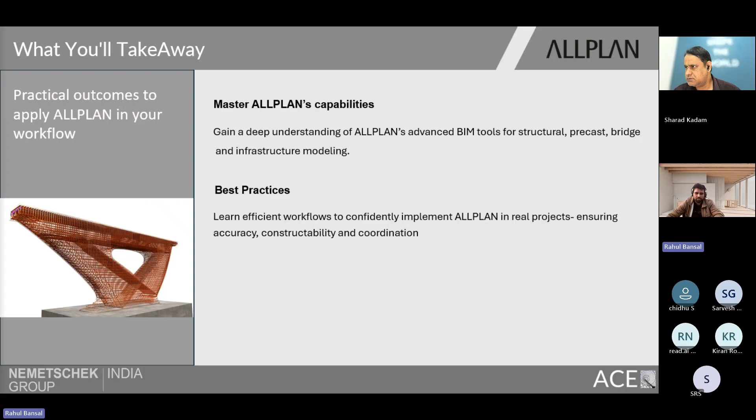Here's what you can expect from today's session: you will gain a strong understanding of Allplan and its efficiency in structure, bridge, or infrastructure modeling. You will also learn best practices, so you leave with the confidence to apply Allplan effectively in your projects. We'll also share resource materials and a participation certificate after the webinar.

I would like to introduce today's presenter, Mr. Sharad Kadam. He is the Customer Success Manager for Allplan at Nemetschek India. Mr. Sharad brings over 22 years of industry experience and has worked across India, USA, Europe, and the UK. His expertise is in structural engineering, bridge infrastructure, precast, and rebar detailing projects, along with some experience in building BIM services. He has hands-on knowledge of multiple industry-leading tools like Allplan, Tekla Structures, Revit, Rhino, Grasshopper, and AutoCAD. Today he will be sharing valuable insights and demonstrating how Allplan supports accuracy, efficiency, and design workflows.

About ACE Consulting Engineers: it is a knowledge and software partner for the AEC industry, and has already supported multiple organizations across India with multiple products. ACE Consulting Engineers is made up of structural engineers and professionals who help deliver efficient and practical economical software solutions. We are proud to have worked with 300 plus clients, delivered over 30 plus products, and supported projects across 20 plus locations.

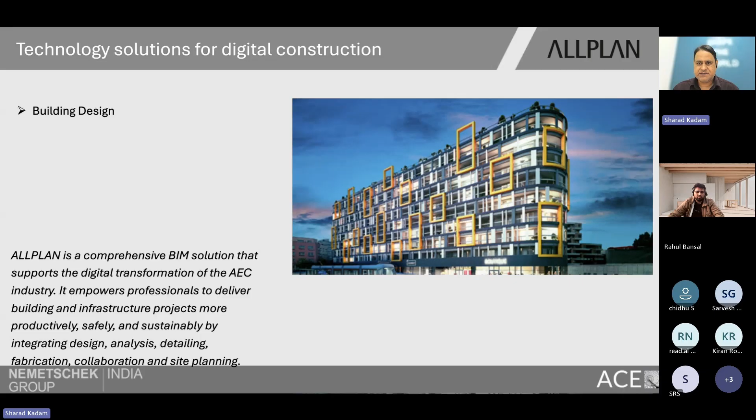To start with building design - this is a vertical of ALLPLAN wherein we can do vertical construction, complete architectural precast, and everything related to building structures. In horizontal structures, we are into infrastructure design, and we can also do analysis and design, modeling, pre-stressing cables, 3D rebar detailing. Everything can be done in infrastructure design. We'll see all these things in detail in the coming presentations.

Then we are into the construction planning segment as well, wherein we can do precast designing or site planning. All these things can also be done.

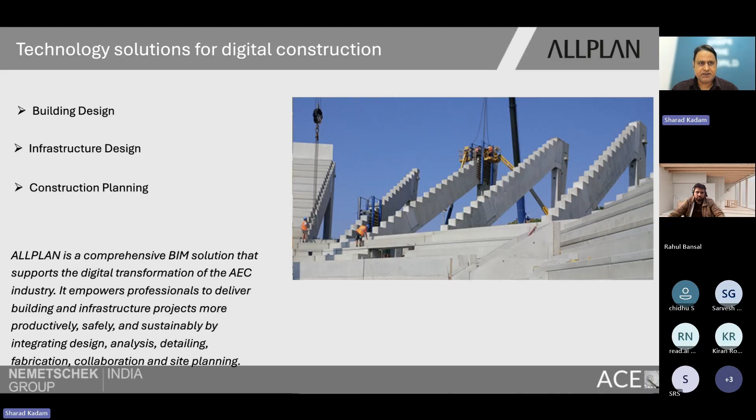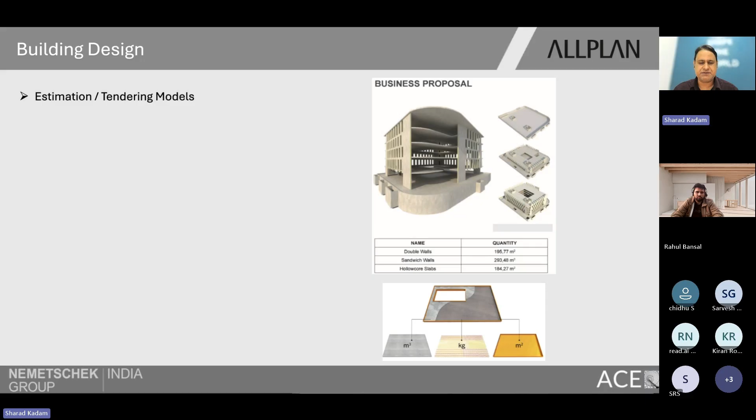Moving on in the building design segment, we can do quick estimation and tendering modeling. This is a vertical wherein a quick tender model has to be created so that it can be presented to the company, and a quick estimation is also needed. In this scenario, we can do quick modeling of the complete project. It may or may not be completely accurate, but rough estimations can be taken out, which will be fairly, we can say, 95 to 105% accurate.

Then the next part is for the rebar detailers. Companies that are into rebar detailing or rebar detailers doing actual project work can also use ALLPLAN for rebar detailing.

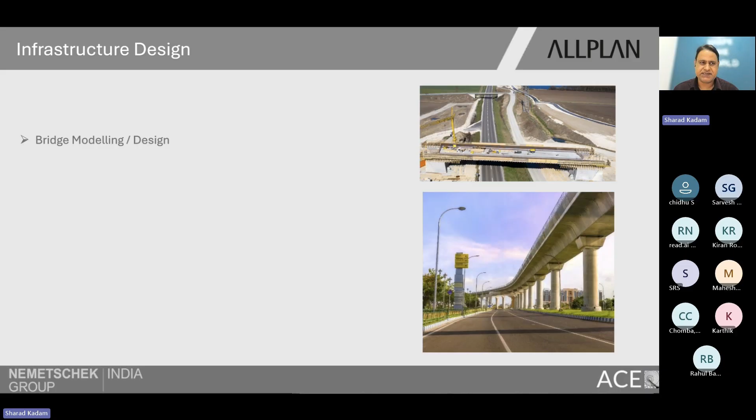The second vertical we talk about is infrastructure design. When we talk about infrastructure, it comes up with bridge - the first and foremost thing. We can do bridge modeling as well as analysis and design. In the analysis and design, we have predominantly all the codes available - British, Euro, ACI standards, all these standards are available. We can do typically any kind of bridge modeling.

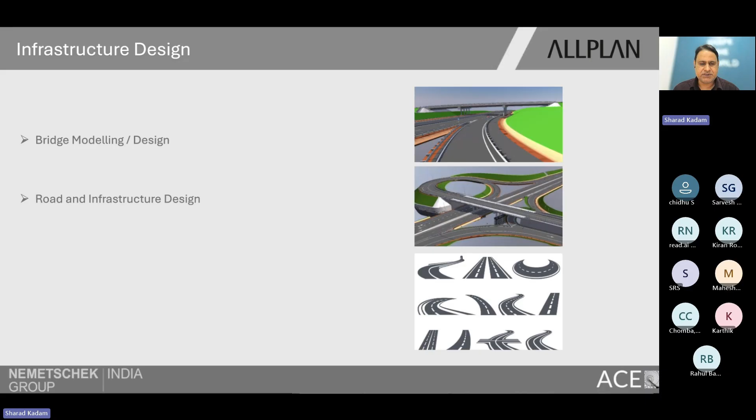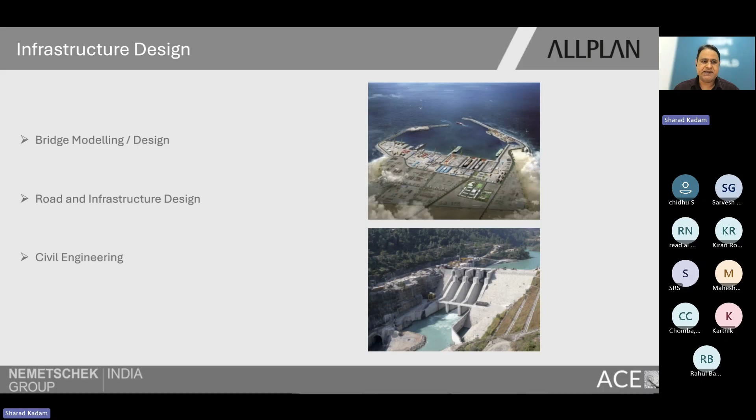The next part is road and infrastructure design. We can do all the road modeling and infrastructure design as well. In civil engineering, we can do heavy civil parts such as dams, hydraulic structures, ports, or anything where concrete is getting poured out. We can do all these kinds of different infrastructure projects.

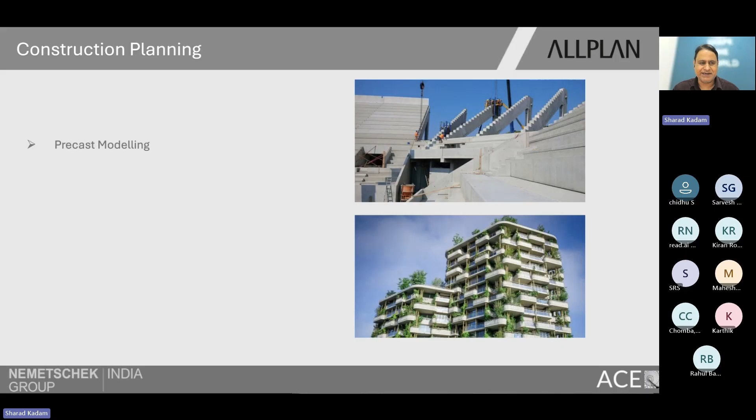In construction planning, the first part is precast modeling. Precast is mainly for residential commercial complexes or stadiums - any kind of precast needed can be done with the help of ALLPLAN. We have really good dedicated tools for precast modeling and detailing. Other than precast modeling and detailing, we can also work for fabrication purposes.

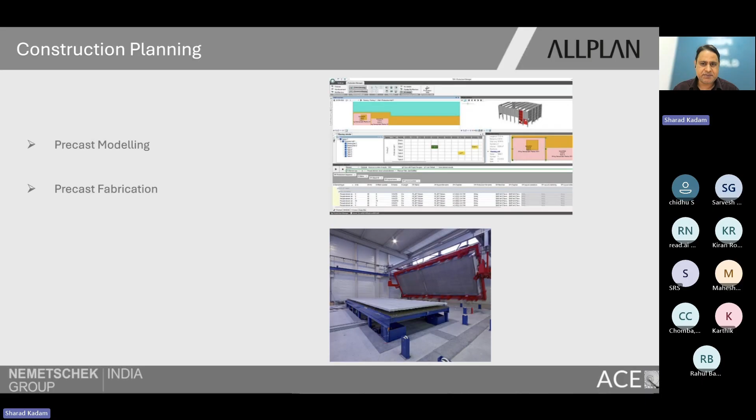Companies having their own precast fabrication plants can also use the feasibility of the fabrication. We call it TIM, which is basically for factory management. So we can do that.

In site planning, we can also work on the formwork. Formwork is something of a niche market - many companies don't prefer to model it, but we can do complete formwork modeling for cast in place or cast in situ concrete.

On the site planning part, there could be some temporary roads, stackyards, junkyards - all these things can be planned at the site in the modeling stages itself, so any changes or painful areas can be identified at the initial stages, and there should not be any surprises coming up later. So this is about site planning.

So in all, we are into construction planning, infrastructure, and vertical constructions as well. Then we have cloud collaborations.

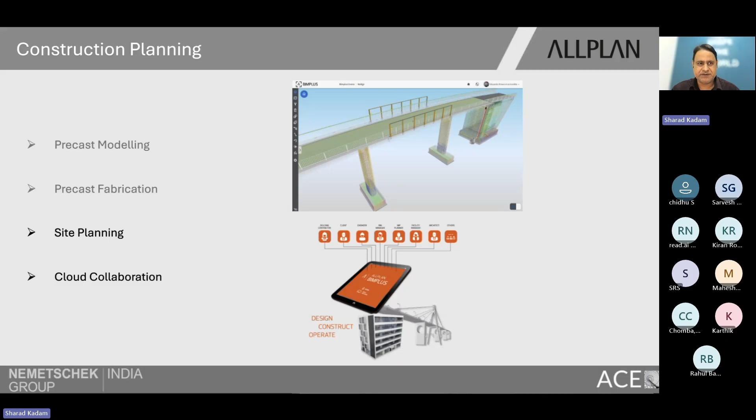After the post-lockdown era, we see that a lot of companies are working from home or remote areas. We have cloud collaboration, that is BIM Plus, which allows multiple stakeholders to work on the same project at the same time without sitting in the office. This cloud collaboration can also send the same model to the site for actual visualization purposes. This is a very useful tool, and it comes free with the software. BIM Plus is very useful for cloud collaborations.

So these are the various verticals that we are having. Moving on to ALLPLAN - it's a very powerful tool which helps for the complete architectural, engineering, as well as the construction environment.

So it's precise. One of the key things we talk about is precise 3D reinforcement detailing. We can detail any kind of reinforcement, and it is reusable. We can save these as templates.

We can work in 2D or 3D at the same time. That means if someone wants to work in the 2D platform, 3D by default is the output we are getting. The model is reliable for cost estimation.

It's an open BIM platform, so if we want to save or send our model to other stakeholders, we can do that from IFC, or there are multiple options to do that. Drawing qualities are superior, and we'll be seeing that in detail in the upcoming presentations.

Predominantly, Allplan can be used for precast. Precast is the first part wherein Allplan is used. We can detail any kind of precast elements, whether it's walls - there are multiple types such as sandwich wall, insulated wall, solid wall, brick wall - all can be easily modeled. Similarly, in slabs, there could be hollow core slab, solid slab, double T slab - any kind of slab can also be modeled.

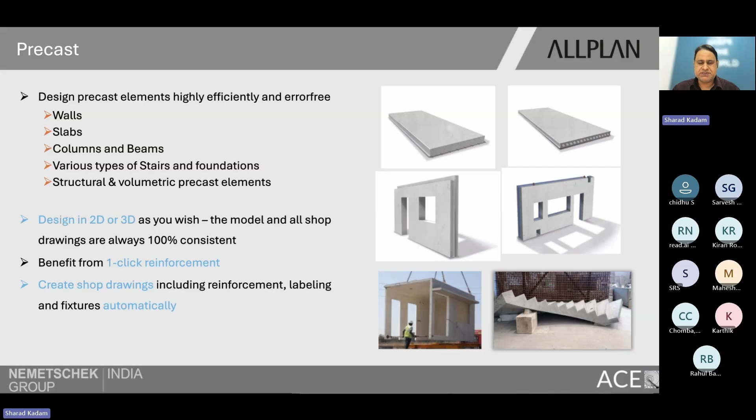In precast, some of the really good tools are for automated wall panels or slabs. With one click, we get automatic rebar detailing as well as all the inserts or fixtures done. We also get quick drawing production. We have some standard templates, or these templates can be created by the user as well - it's very easy to create these kinds of templates, so the output drawings we get are superb, roughly about 90% good to go.

There could be some manual work needed, but it's very minimal. The workflow is such that we can switch between 2D and 3D at any point in time.

We also have some really good tools such as IFC wall slabs - if someone is getting the model from any other software, we can import it through IFC, and that same IFC can be converted to walls, slabs, or any other precast element with one click. We have something similar for reinforcement for staircases as well.

We also have integrations with fabrication equipment - whether using a fabrication tool from Elematic or any other precast company, we have integration with that as well. We have BIM+ collaboration, where multiple people can work on the same model at the same time. The last part is the TIM portion, which is basically factory management. So that's about the precast portion.

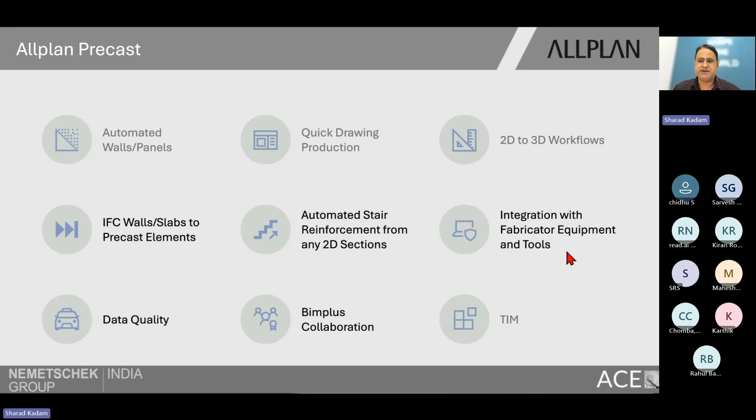I'll just run through a small AV. Here is a small model where we can see some walls. I've just isolated one wall - this is basically a sandwich wall. With the visualization tools, we can switch things on and off as required.

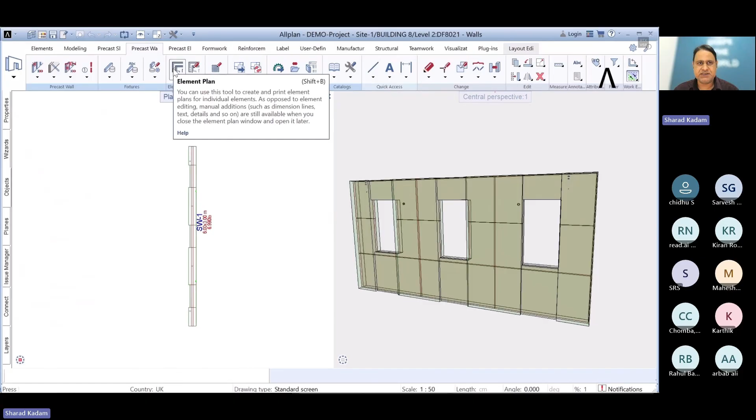With one click, we can create the drawings here. We can select some of the templates that are created, and choose the template as per our requirement.

Multiple templates can be created for the same element. So this is the default output that you're seeing, where all the views are clearly identified.

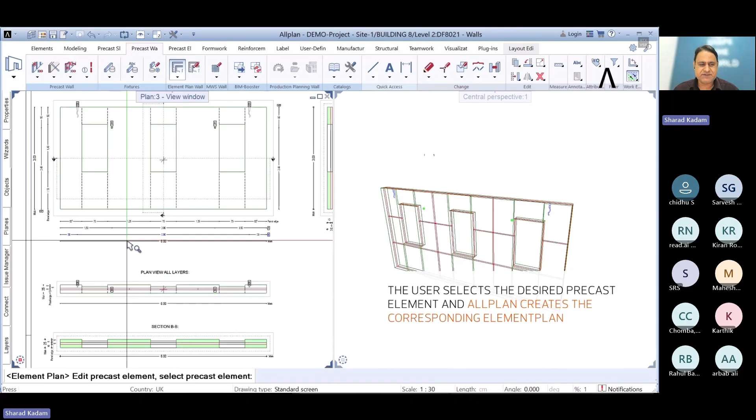On the left side we have a 2D plan, which is basically the drawing, and on the right side we have a 3D model. So we can see both the drawing as well as the model at the same time. We don't need to close the drawing and go back to the model for doing any kind of changes. We can make changes here in the drawing, and they will get automatically updated in the model. Or if you're comfortable changing it in the model, that's also possible, and the drawings will get automatically updated.

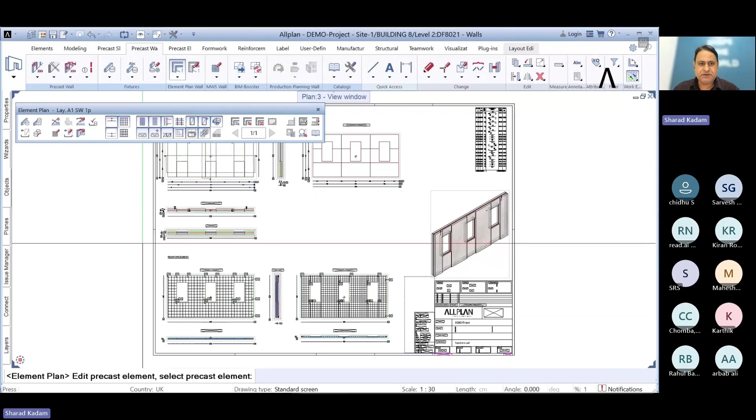If you want to see the rebar, because there could be some views for rebar, it automatically comes up with the labeling, that is the bar mark and everything, as well as the bar bending schedule. If I need to see the 3D view, we can switch it back again.

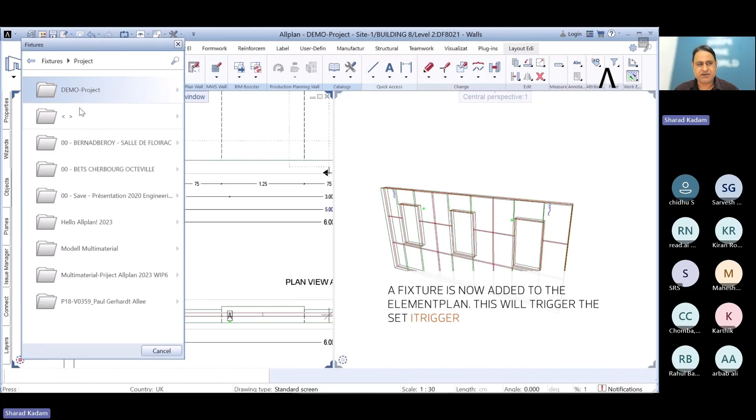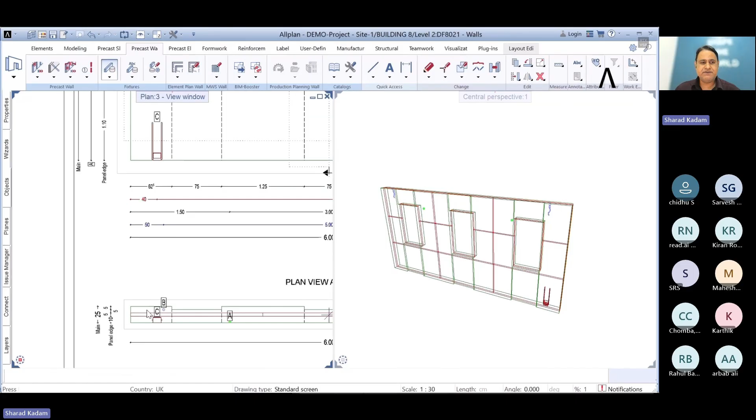Here we can identify that some fixtures or inserts are missing. We can put them in at the drawing stage itself, or at the modeling stage also. So here I'm choosing some of the inserts, and we can put them into the modeling directly from the drawing. If you're comfortable putting it into a section and choosing the location where it needs to be placed, with one click you can see it has automatically identified it, and it has updated the dimension also, because whenever we add something we need to check whether the dimension is correct or not.

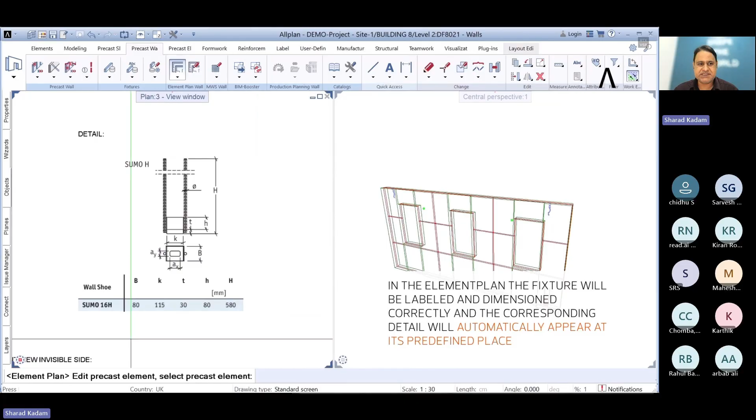Here we can see it also adds some cross-sectional details. These things we can easily obtain, so there is no manual detailing work needed. Also, if the rebar needs to be cut at that particular location, it automatically gets cut, and again the bar bending schedule updates. Also, the bill of material gets updated.

If I just add one Peikko insert, it automatically identifies and gives the quantity. Now, if I need to do changes at the modeling stage, I can just copy these Peikko inserts to some other locations, and it will automatically update the quantity as well. So this way, we can choose to work in the model or in the drawing at the same time, and whichever is changed will be automatically updated in the other.

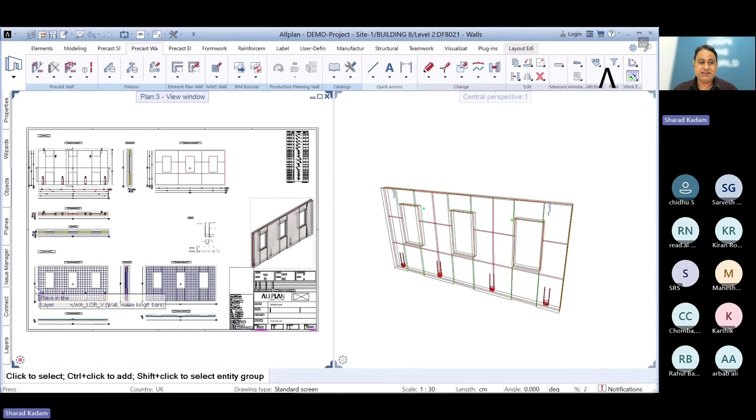Once my inserts are added, it automatically does the labeling portion as well, so we don't have to check whether the labeling or dimensioning is proper or not. These are some really good features available in Allplan which are not available in any of the precast detailing tools we have in the industry.

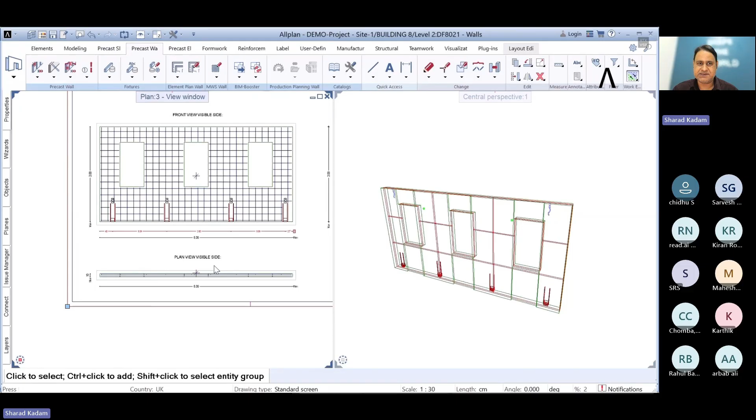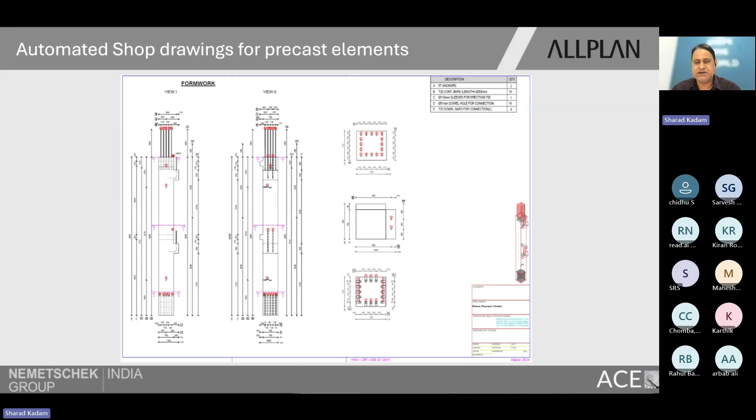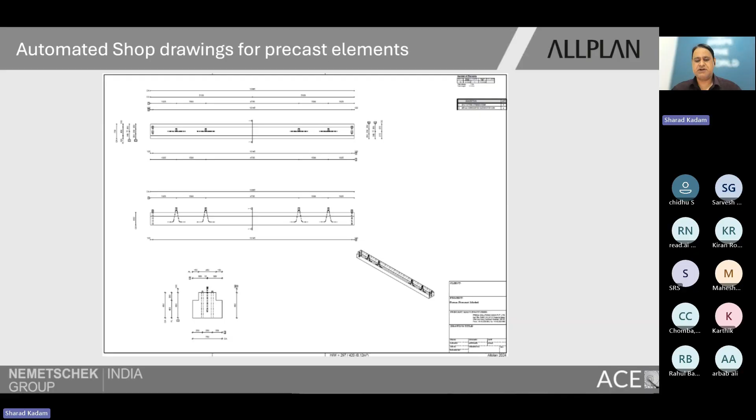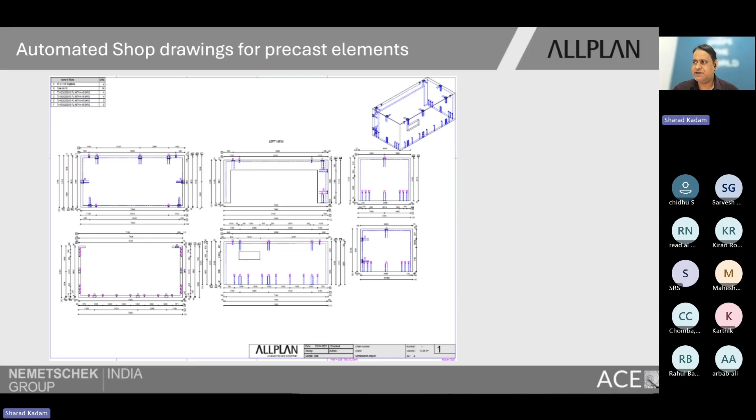Some more drawings, some beam drawings. Typically beams have lifting inserts and connections at the end, and there could be a couple more cross sections needed to be added. We can plan our template so that our drawing output will be 100% accurate with no manual work needed. This element we call a volumetric element, where we need to create views from all the edges or end views, and a 3D view is also needed. This drawing too has been created with zero manual work.

Moving on ahead, the second vertical we talk about is the bridges. The first vertical we saw was about precast, whether residential, commercial, hospital buildings, or parking garages, any kind of precast elements can be done. The second vertical is Allplan Civil, which covers the infrastructure part, that is roads, bridges, tunnels. All these things can be easily done with Allplan Civil.

Allplan Civil is basically a template-based design, so again we can create templates which are reusable. Suppose we have some bridges, maybe single deck bridges or normal pre-stressed bridges, we can create the templates and save them, and this can be reused for our next project.

Then we have parametric modeling. So if there are any changes in my alignment or axis, the project gets automatically modified accordingly.

Then we also get some automated reports. So once my model is completed, we also need to create drawings, bar bending schedule, reports, quantity takeoff. All these things are automated because my model is the real source of truth.

Then we also can do the rebar detailing, clash checking for rebars if it is clashing with any of the inserts of bridges or embeds. So we can identify it at that stage.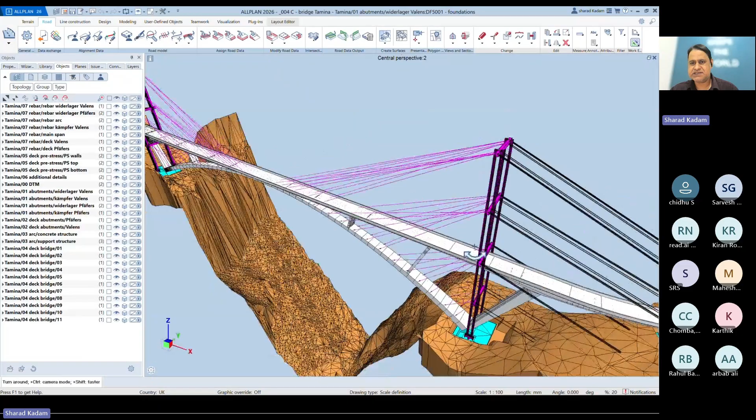It's including the rebars, and everything has been modeled here. So you can see that a complete bridge with pre-stressing cables is also available here. So all these things are being modeled in ALLPLAN. This is basically for doing complete rebar detailing and all.

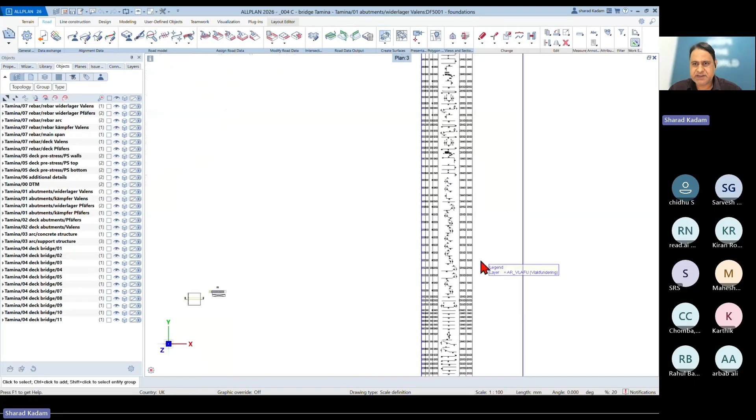Now I'll take you to, yeah, I'll just move one step here itself so that I can show you about the bar bending schedule as well. So here we have the bar bending schedule. Immediately as we create some rebar details here, you can see that this is the default bar bending schedule that is getting created. So we don't have to spend any extra time creating these kinds of bar bending schedules.

And this is basically drawing based. So whatever rebars have been modeled or detailed in that particular drawing, we will get all these things here. And this bar bending schedule is fully customizable. So suppose if we have our own standards, we can modify it and use it as per our requirement. So when I'm here, I'll just talk a bit about these particular things.

So basically, when we talk about ALLPLAN, it starts with architectural surroundings. Architectural and surroundings are for companies that are into the architectural segment and want to do complete architectural work. So here we can use this, and you can see that our top menus automatically change based upon that. So we can do complete architectural surrounding work as well as infrastructure.

So I was talking about infrastructure, that is the bridges. If we want to do the bridges portion, we can do it here. Other than that, if someone is interested in the precast portion, we have precast tools available, starting with precast slab, precast wall, and anything other than slab and wall comes into the precast element. So we have some really good dedicated tools as per our requirements. If someone is into precast, we can stick to the precast tools and precast elements.

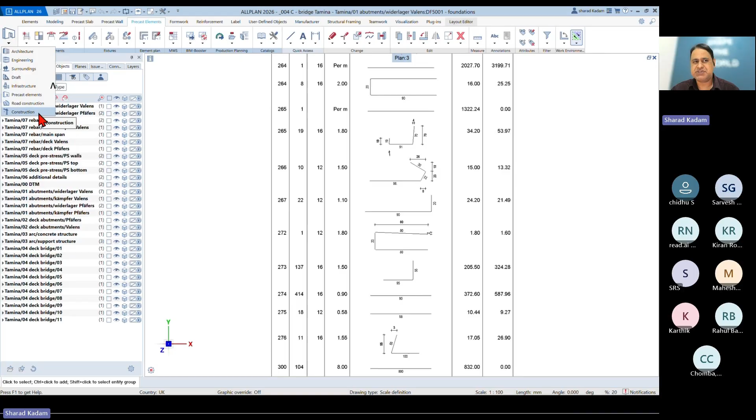Someone into the infrastructure portion can stick to the infrastructure portion. And we also have road construction and the actual construction things as well. So that's about the ALLPLAN side on the civil portion. So typically any kind of bridges, we can model it out here, and it's really very easy to model and handy as well. It can be worked in 2D as well as 3D mode.

Now coming back to the ALLPLAN civil portion. So this then is the graphic user interface, or GUI, what we call it for ALLPLAN bridges. For companies into bridges, you can see that here we can easily create some really good models, which can have, starting with the substructure like pile cap, or if we start with the abutment portion at the start, at the end abutments are there.

We can model these easily, and we also have some I-girder beams here with the pre-stressing cables, as well as the rebar can be easily modeled here. So when we talk about bridges, it starts with the digital terrain.

So here we have the digital terrain as well. If you're not getting a digital terrain, it can also be obtained from Allplan, or if you're getting it from other software companies or providers, we can import that too. Allplan is an open BIM platform wherein we can import data from other software, as well as export it to other software.

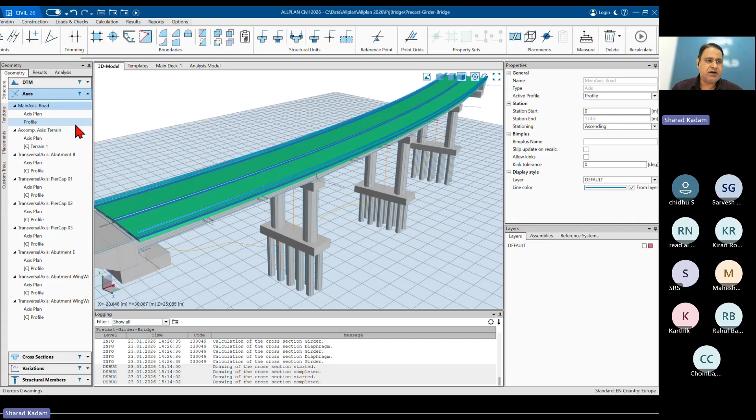We have various kinds of axes available. When we talk about horizontal construction, rather bridges, tunnels or roads, we talk a lot about the axis. So here we have different kinds of axes. There could be multiple axes for a project - horizontal, vertical - and we have the feasibility of modeling any kind of axis at this particular location.

Also, if we are getting the axis from any other software like Civil 3D, we can directly import it over here. So we don't need to redo the things which have already been done by someone else in some other software. We can import it directly here.

The next part comes up when we talk about the cross section. So let's say if I have some decks like this for bridges, or some girders like an I-girder bridge, we can easily model it. Here you can see some horizontal and vertical lines which are maybe straight or inclined. We have to just connect the dots and create our own deck or girders as per our requirement or design requirement.

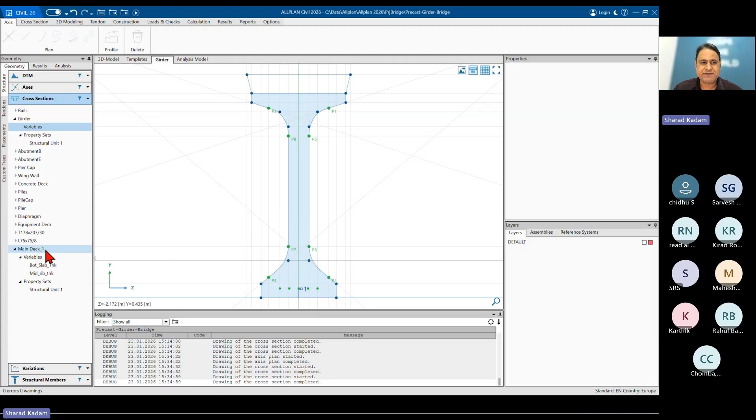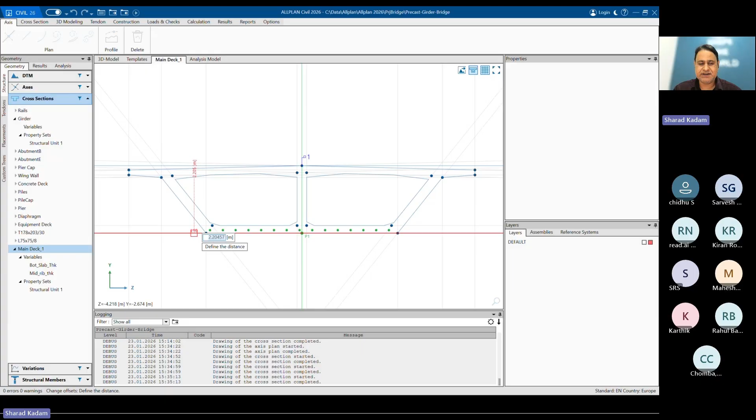These things are completely parametric and reusable. So suppose if we have created something with a 13-meter span, a 30-meter width of carriage, and there is a second bridge of maybe 6 meters, with dimensions changing - we don't need to create it again, the same thing can be used. This is completely parametric, so suppose if my height is changing, we can easily make changes within there itself. We don't have to redo the things again and again.

That's something which we call templatization - create a cross section, save it as a template, or we can save the complete project as a template as well. That depends upon the project-to-project basis and the user-to-user basis.

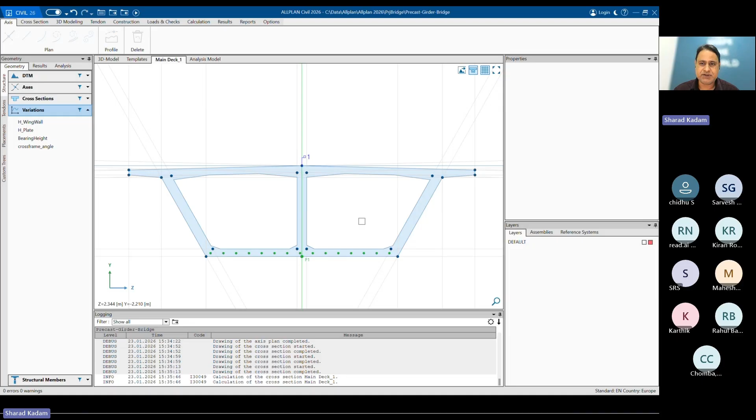Then we have the variations - variations means the changes. Generally what happens is in bridges, the height, depth, width, thickness all change or vary according to the length of the bridge. So we can create some tables like this. These kinds of tables can be imported from a notepad file or an Excel file, and these things can be easily copied and pasted out here. So these are the variations that we talk about.

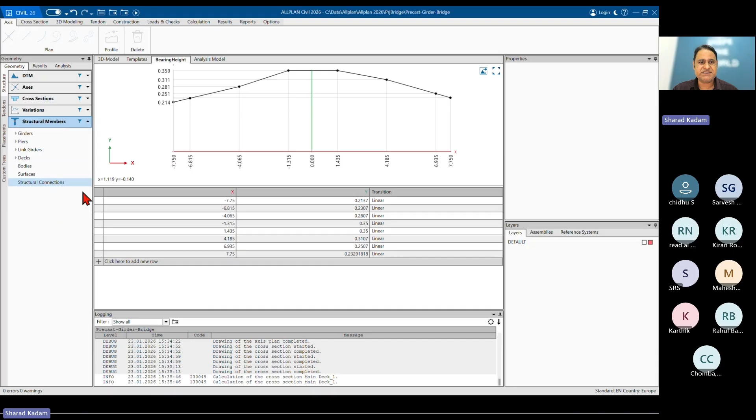Then in the structural members, typically any kind of structural member can be modeled - whether it's a girder, pier caps, decks, anything can be easily modeled and created here. This is primarily for the bridges.

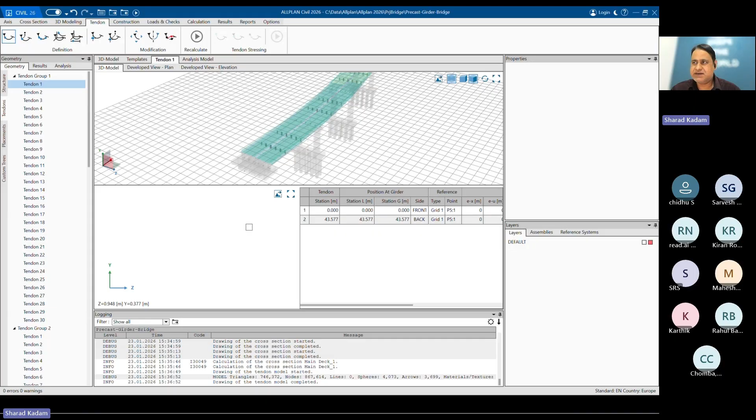Once this is done, the next part is the pre-stressing cables or tendons, as we call them. We can model any kind of pre-stressing cables or tendons - we have really good tools available for modeling tendons. For a girder, the tendons may generally be horizontal, or there will be a slope inside it. We can model any kind of tendons with these tools. When it comes to bridge modeling, this tool is super easy and very efficient for modeling any kind of bridges.

Now coming back to my presentation here - this is a particular project wherein we have done the tendon modeling. This tendon modeling, again, was varying with the geometry, and the customer found it to be very easy for doing these kinds of pre-stressing cables or tendon modeling with Allplan. To do the same thing with any other software, we need a couple of more software like Grasshopper, Rhino, Dynamo - then only this kind of freeform modeling or tendon modeling can be easily done. But all these things are inbuilt with the software for us.

Then we can create, once my tendon modeling is done, we can create the drawings as well for that. Here are some of the drawing examples, which is for those purposes.

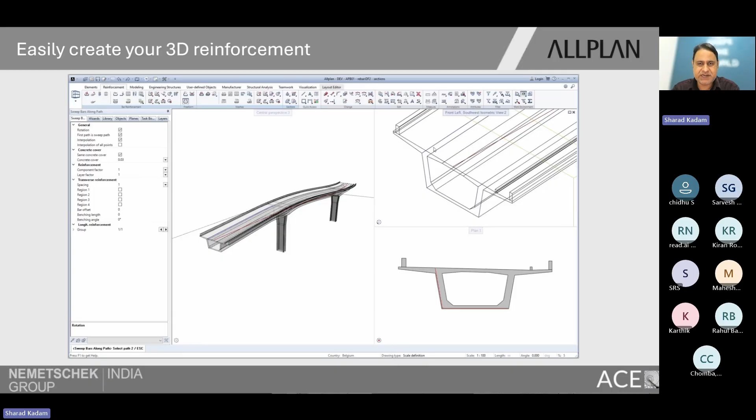And once this is done, rebar modeling comes into the picture. We have really good tools for rebar modeling - tools which, as I was talking about, with one click we can do complete rebar detailing, as well as choose the rebar as per our requirements.

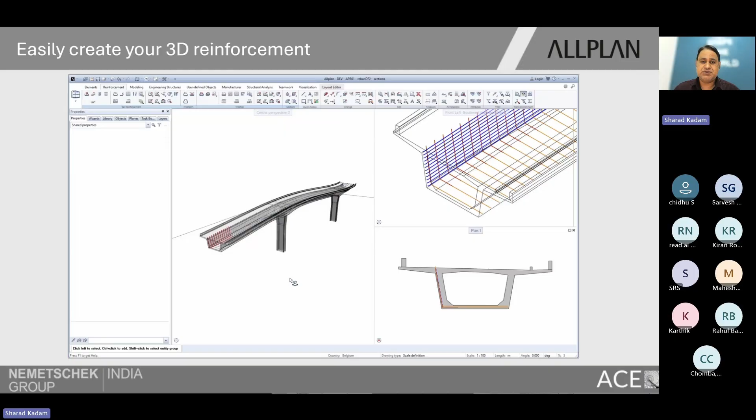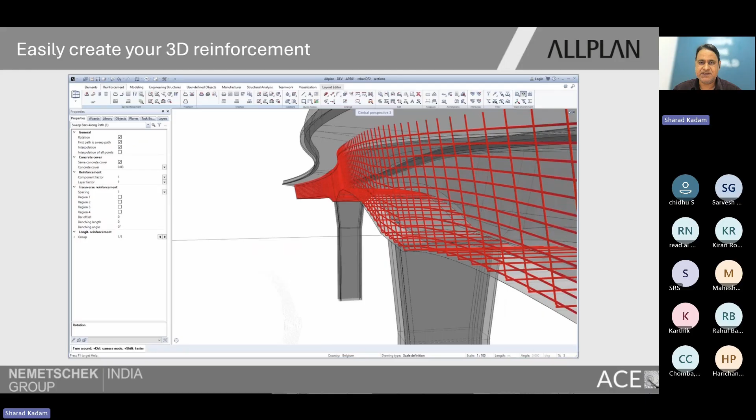So here you can see some of the rebars have been modeled in the plan, but these rebars vary with the geometry. This generally happens with bridges - the bridge geometry is varying and I want my rebar details to also vary. So in one click, a complete rebar can be modeled for a complete span of bridges, or as per our requirement we can use these tools. These tools are very handy and they change as per the geometry. As my bridge varies, the rebars also get updated with it. So these tools are really very good for modeling any kind of rebar for any kind of shape - this can be easily done. Some real good tools for rebar detailers are available here.

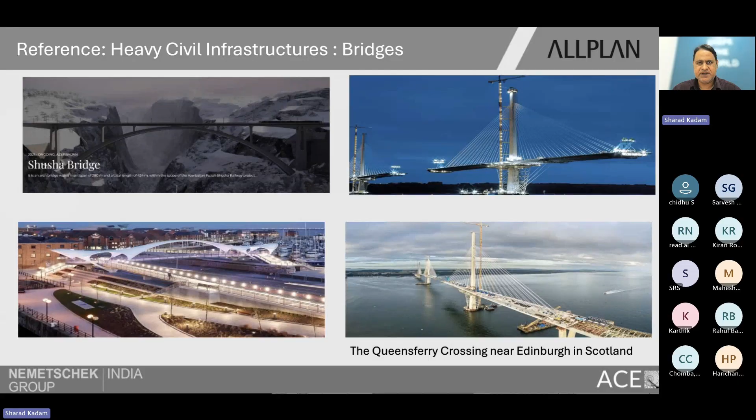So these are some of the reference projects. The topmost left side is basically the Shusha Bridge - it is the tallest bridge in the Europe part. On the bottom side we have Queensferry Crossing, in Scotland, Edinburgh. So these are a couple of bridges done using Allplan Civil. Then there is one more project - this is basically the Tamina Bridge, done in Switzerland. It's a 417 meter long bridge, and a complete model has been done with the help of Allplan only.

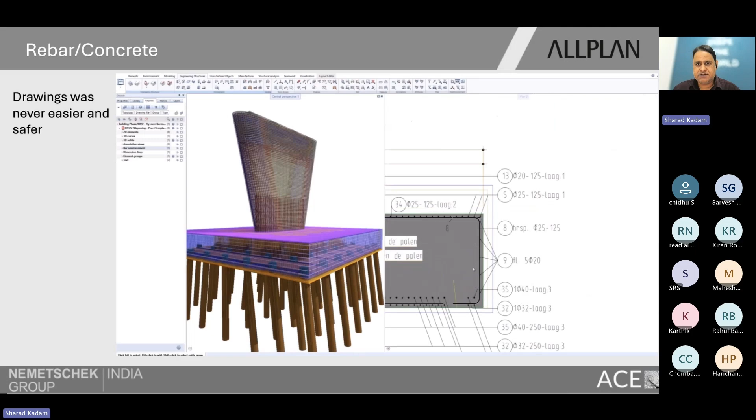Now I'm coming back to the rebar detailing. This is also for rebar detailers as well as can be used for bridges. Here you can see on the right hand side I have the drawing, on the left hand side I have the model. So I can see both things at the same time at the same locations. We can easily work either in drawing or model, and any changes I need to make, I can do it at that particular location.

Here we can see that bar number 9 has a quantity of 5, and once I click on that bar, the same bar gets highlighted on my model also, or the cross section, or in the drawing, wherever it is located. If there's any change needed for this particular bar - let's say the quantity is 5 and I need to change it to some other value - you can see it also shows in the next top section. So if anything is selected, that particular rebar will get selected at all locations. It's very easy to identify and change.

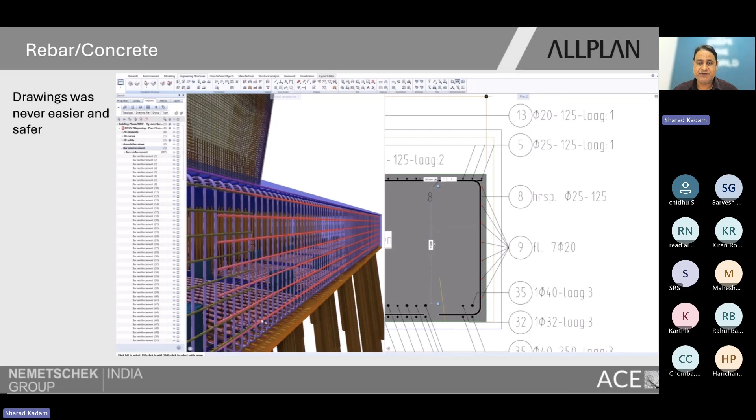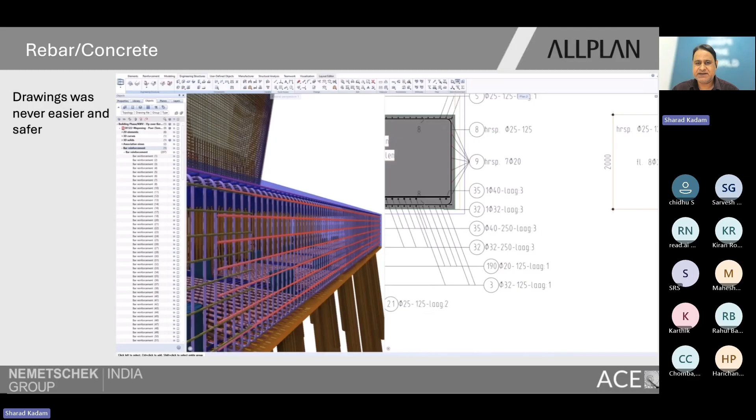Now if I need to change the quantity to 7, I can do it in the drawing mode itself. We don't have to close the drawing, go back to the model, and come back to the drawing portion - that's typically how the workflow is with other software. But in Allplan, we can do the changes at the same time from any location. We don't have to do drawing closures and all this. Once these drawings are updated, the model will also get updated at the same time, as well as the bar bending schedule portion.

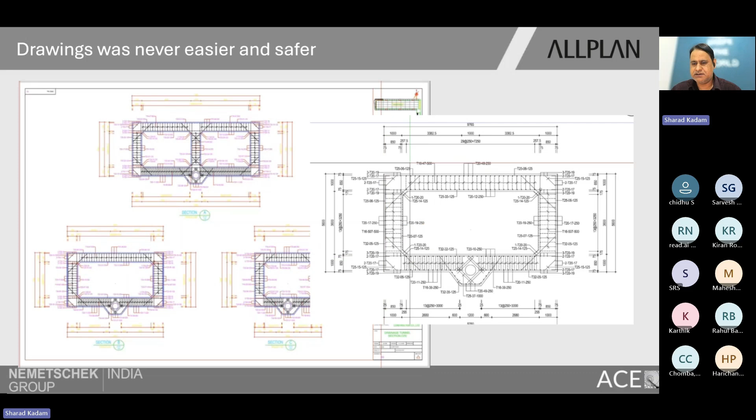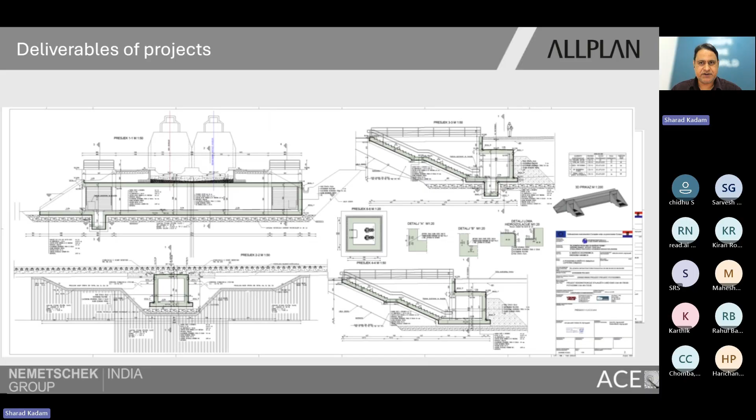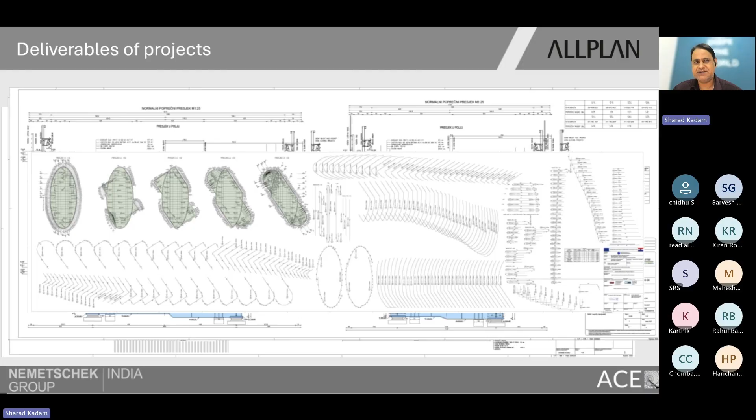So these are some of the drawings that have been created or extracted from Allplan. We can do any kind of drawings - some of these are deliverables from actual projects we're showcasing here, for metro projects or station projects also. Anywhere concrete is coming up, we can do it. This is a road project done in Allplan. Again some abutment portions for bridges, some piers - typical reinforcement was used for this particular client, and they wanted it shown on the drawing itself.

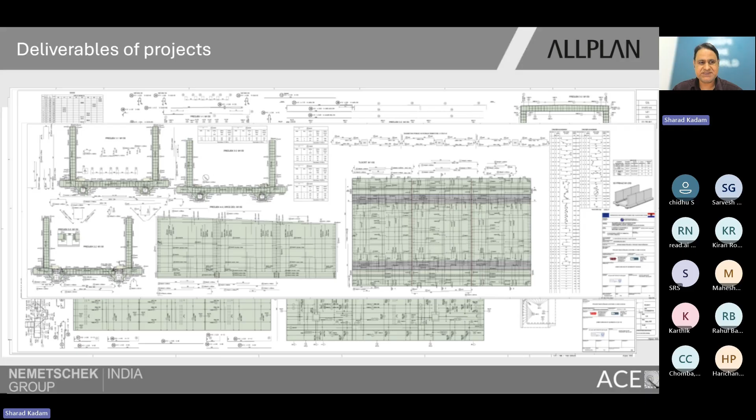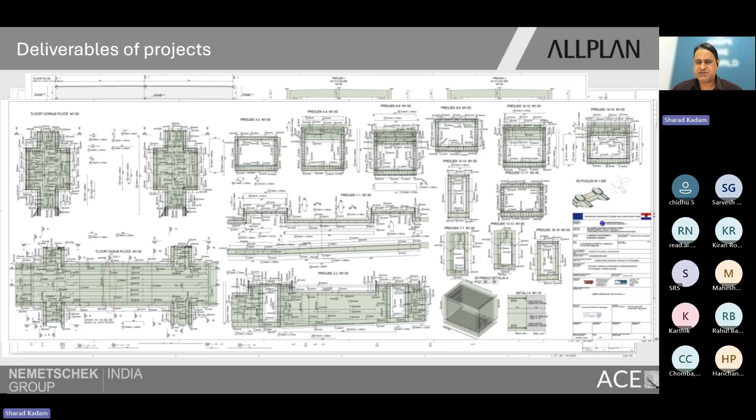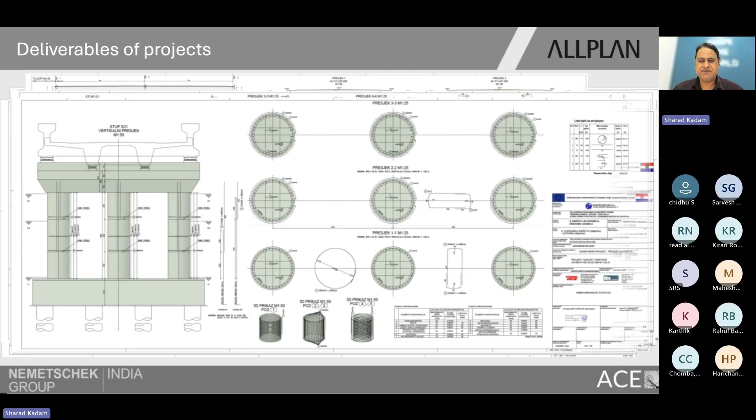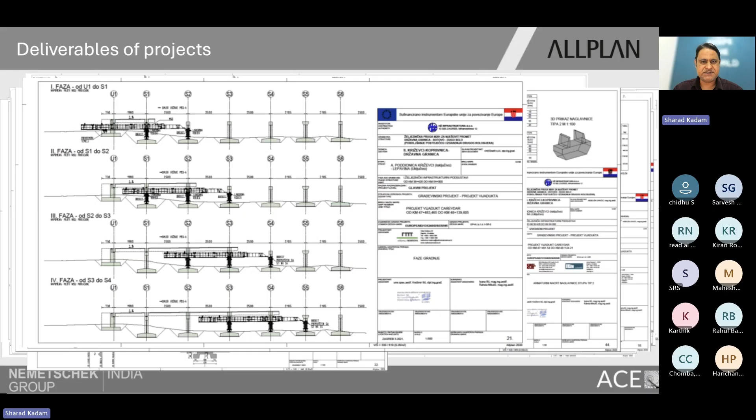Sometimes we also need to see a 3D view in the model or drawing itself for presentation purposes - that can also be taken care of. I'm moving a bit faster on this drawing side, I think it's easier to understand. All these drawings are actual project drawings created by customers. It's not just a model - it's model, drawing, reports, BBS, everything, anything and everything can be created in Allplan. These are some deliverables for piers, for caps, and this is again for some foundation. So all in all, Allplan Civil can be used for bridges, infrastructures, any kind of bridge, tunnel, infrastructure - we can do it here.

Allplan Precast can be used by precast modelers and detailers, precast fabricators, and companies doing the erection of precast. Then the last part is rebar detailing - anyone doing rebar estimation, modeling and detailing can use it, and companies in the outsourcing business can also use it.

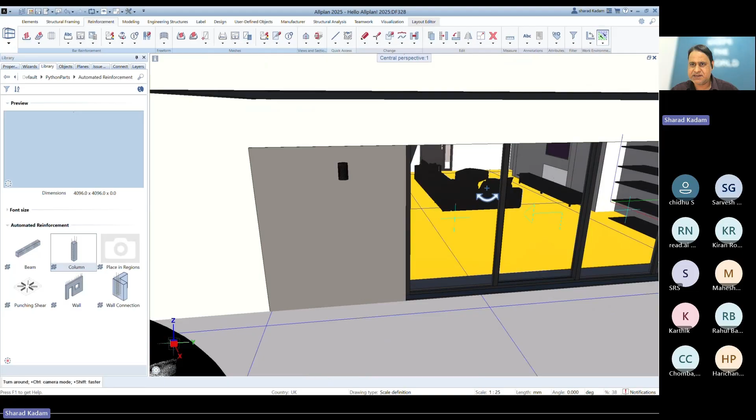I'll take a couple more minutes to showcase some of the really good tools here. Going back to my software because seeing the actual software is a good thing. Here we have a complete architectural model - I've taken a small villa or bungalow to showcase how detailed modeling can be done, including the architectural portion. You can see the interiors, furnitures, and everything, including vehicles, also being modeled here. This is the perspective view, and now I'm going to my plan view.

What I was talking about is some really good tools. Here we have some wizards available that can be directly taken in. And for rebar detailing, we have some really good tools - we're not talking only about the modeling portion, but about rebar detailing.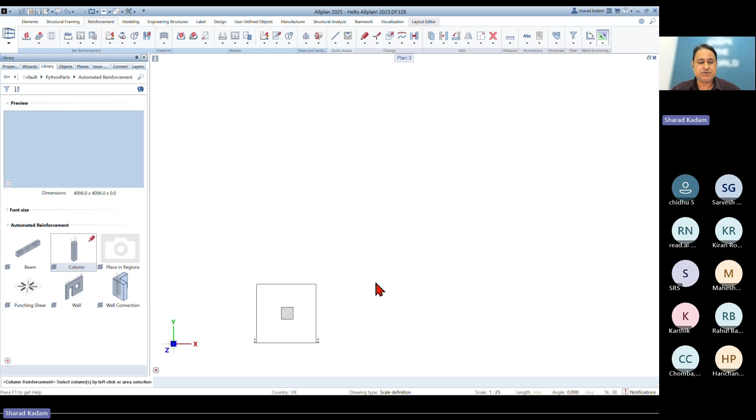Here we have rebar that can be added in one click, and this is completely customizable. We can change the bar sizes, how we want to bend it - all these things can be done. There could be various zones in the stirrup, so we can have that as per our requirement.

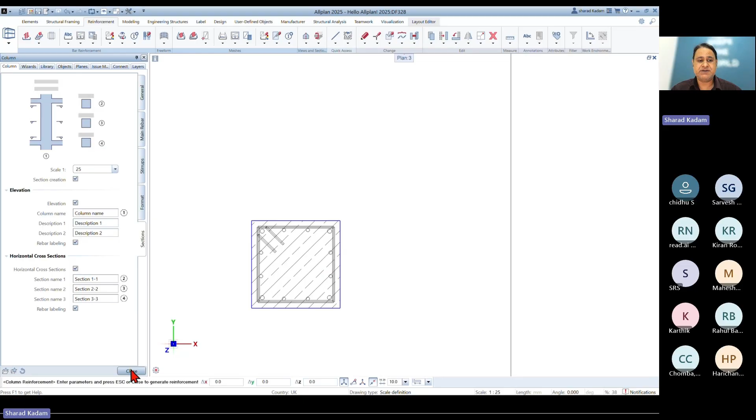Also, we can create cross sections for drawing purposes as per requirement. I'm just choosing three cross sections as needed, and whatever reinforcement is okay for presentation purposes. You can see that the model has been created.

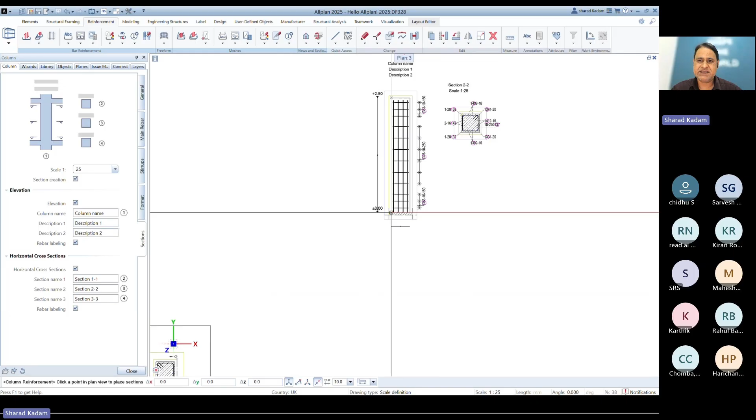Not only the model, I can easily create my drawing at the same time, so we don't have to spend time separately creating the drawing. A drawing is getting created with three cross sections as per requirement: top, middle, and bottom level. These cross sections can be easily created, and tagging can also be done. This shows how good the tools are - this is the macro method, or what we call one-click reinforcement for drawing.

But not only this - suppose you want to do some manual detailing, that's also possible. We have some really good tools available here. Here is my column detailing that I've done. So we have manual detailing work available, and macros are available for many areas such as beam, column, stairs - all these different macros are available.

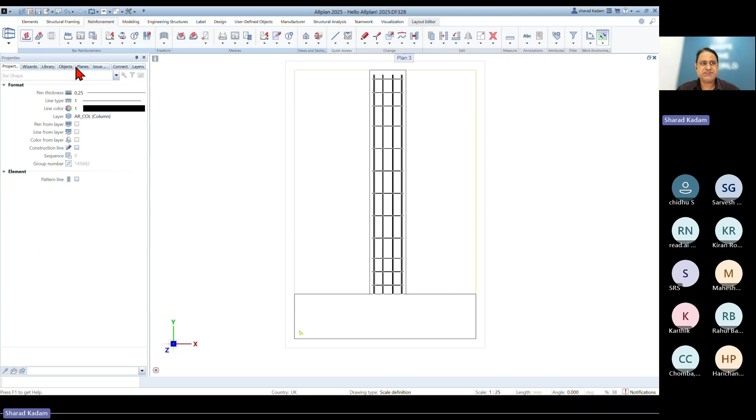Suppose I want to do rebar detailing by manual method, that option is also available here. By default we have some standard shapes such as stirrups, L shapes, straight bar, crank bar, hook bar - all these things are available.

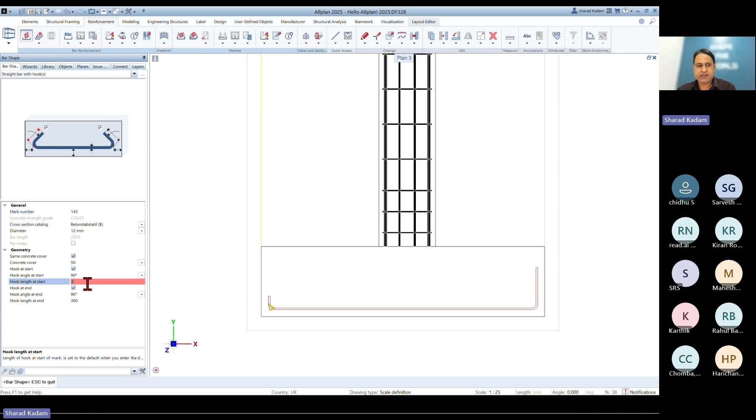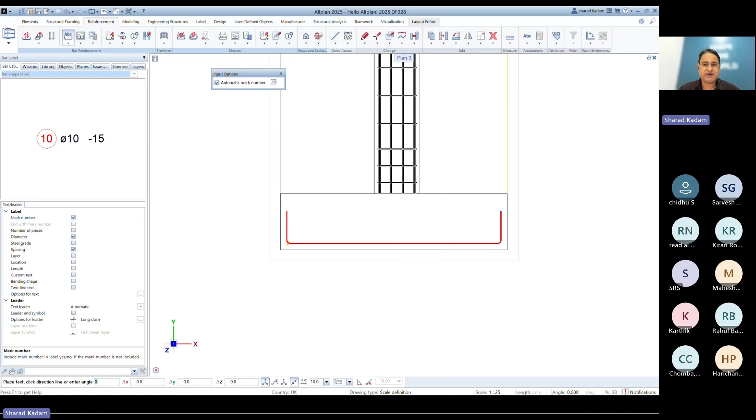Here is the rebar, you can see that it has been added. Then comes the numbering - automatic bar numbering is completely automatic. It also gives you the label at the same time, so we don't have to complete the rebar detailing and then go for labeling separately - we can do it at the same time. These settings can be changed as per our requirements, but I'm just taking the default options available, and this is completely customizable.

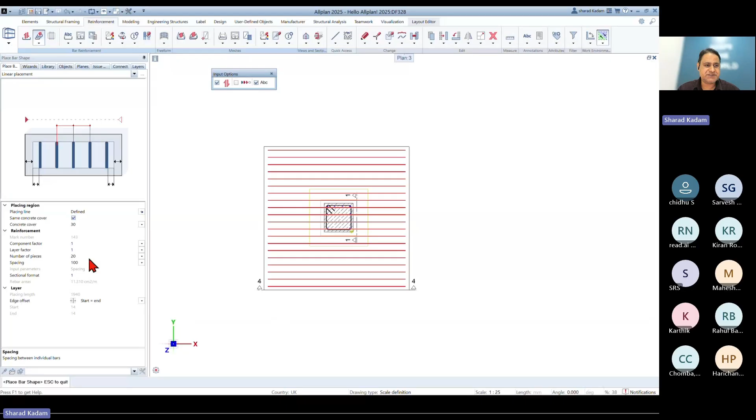Once this bar is placed, I need to tell the software the range of it. You can see that the software has automatically identified the ranges as well, but if we want to change it, we definitely can. We also have options for changing spacing, number of pieces and so on. Once this is done and acceptable, we just hit the escape button, and the rebar gets placed. Now the next part is showcasing the range for this particular rebar.

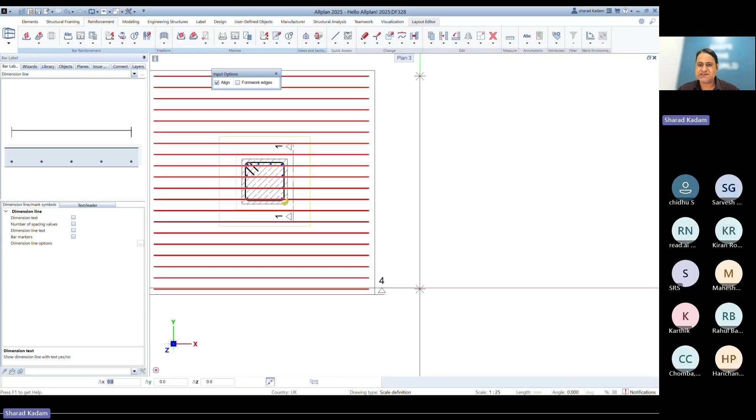It automatically identifies the range and places it accordingly, as well as gives the tagging. This tagging can again be customized as per our requirement. We are talking about placing the rebar, tagging it in section and in plan, at the same time without putting in extra effort.

Suppose someone is comfortable doing the rebar detailing first and then the labeling, that is also feasible. So these are the various tools available: manual detailing, rebar detailing, macro detailing. Everything can be easily managed at the same time.

We can also immediately get the legends, or basically what we call the BBS. We have ACI standards as well as the normal BS standards or Indian standards available, so we can choose and place it. And these tools are real live.

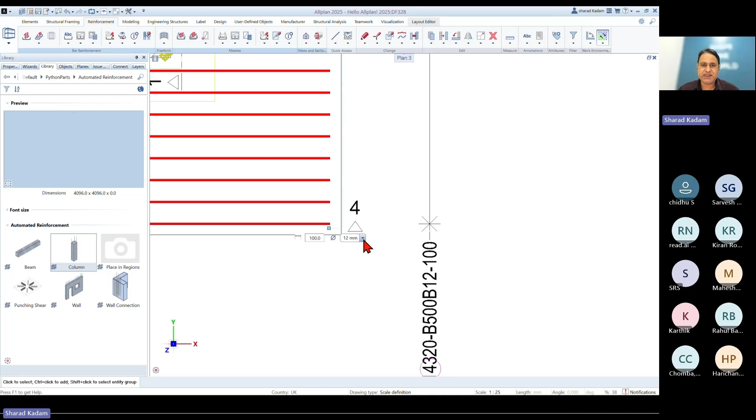Once you place the bar, automatically the bar bending schedule gets populated, and changes can also be made. Suppose I choose this bar and instead of 12 I need to put 16, we can do it, and the same change will get reflected everywhere, whether it's a tag or the cross sections. Everywhere these changes will automatically get updated.

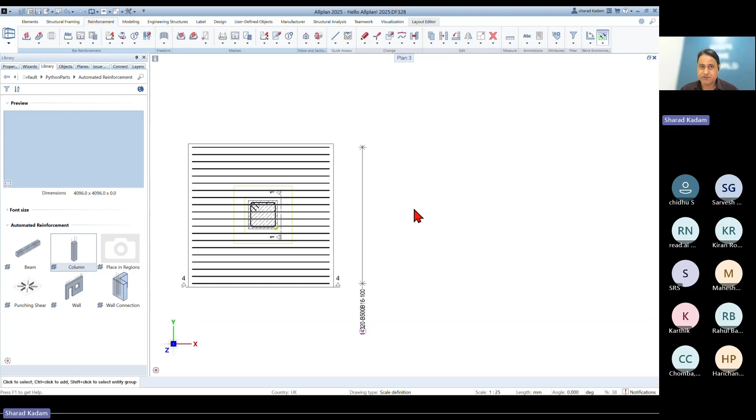So we don't need to worry about it, whereas generally when people do this in a 2D environment in AutoCAD plus Excel, they have to take a lot of care of these things, but here we don't have to. Other than that, we also get the schedule if we are working on architectural projects—we wanted to get the quantity call off for windows, doors, how much is the room area, and all this, we can get easily.

The software is completely customizable, and the customization is very easy to do. We can make any kind of changes as per our requirement, and it's Python based. So if someone has knowledge of Python and wants to automate the process, they can do it on their own.

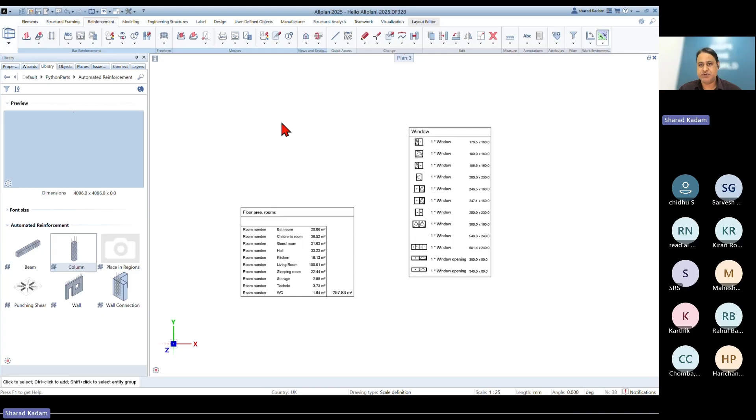So these are all the tools and verticals that we are talking about. We talked about bridges, tunnel infrastructure, roads, precast, and rebar. These are the various verticals available for Allplan. To sum it all, we can use Allplan for estimation, tendering, reinforcement modeling, reinforcement detailing, road and infrastructure projects, precast modeling and detailing, and bridges and infrastructure projects. We can also do analysis and design for bridges and infrastructure.

So typically we have four verticals: plain Allplan, Allplan for precast, Allplan for civil, and BIM Plus. BIM Plus is a cloud-based platform which collaborates all the things, and it comes free with all the Allplan solutions, so we don't have to pay extra for cloud collaboration. Typically, for any kind of project where concrete is involved, Allplan is the preferred solution.

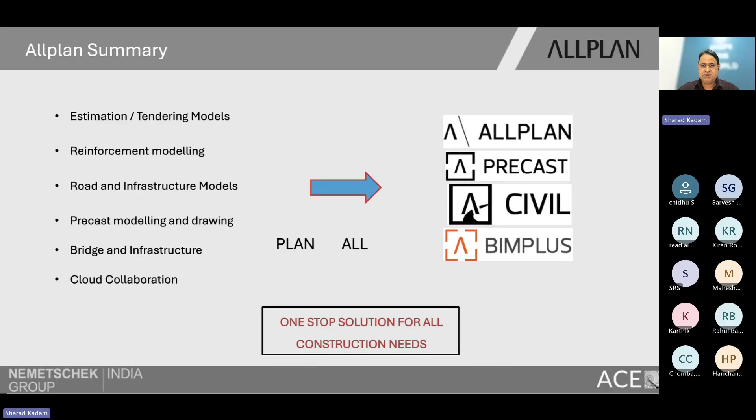This first question is about steel structures: will Allplan software do the 3D model analysis for steel structure? Predominantly Allplan is for modeling purposes, and the analysis and design part is available for bridges. For steel structure analysis, we have other software available as well.